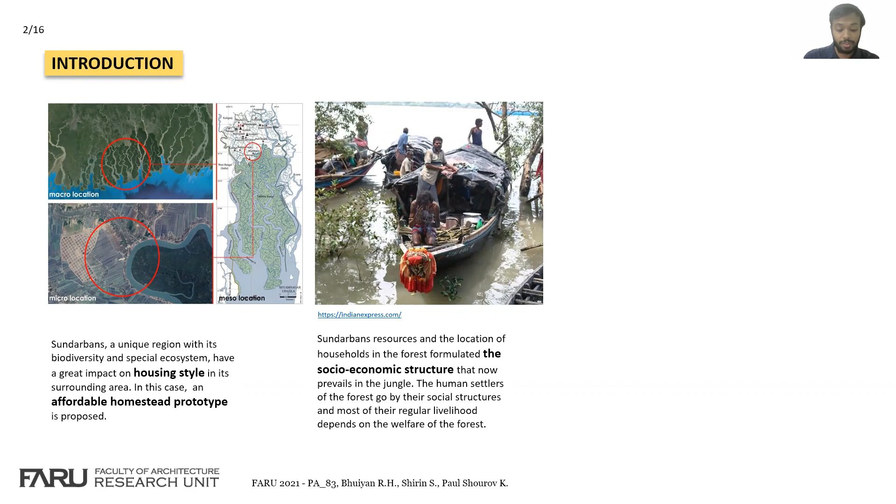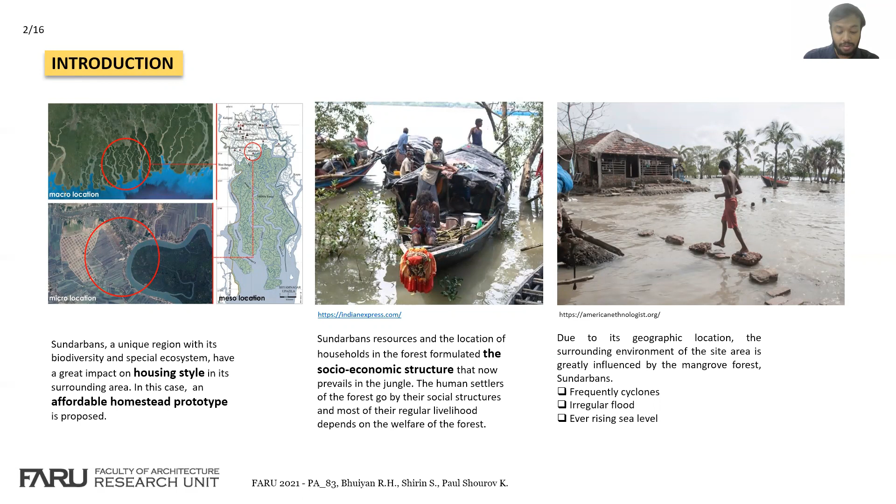Due to its geographic location, the largest piece of uninterrupted mangrove habitation of the world is a highlight for many natural disasters. The common natural hazards that the Sundarban region faces regularly are frequently occurring cyclones, irregular flood, and the ever-rising sea level that is causing the decreasing land area of the forest.

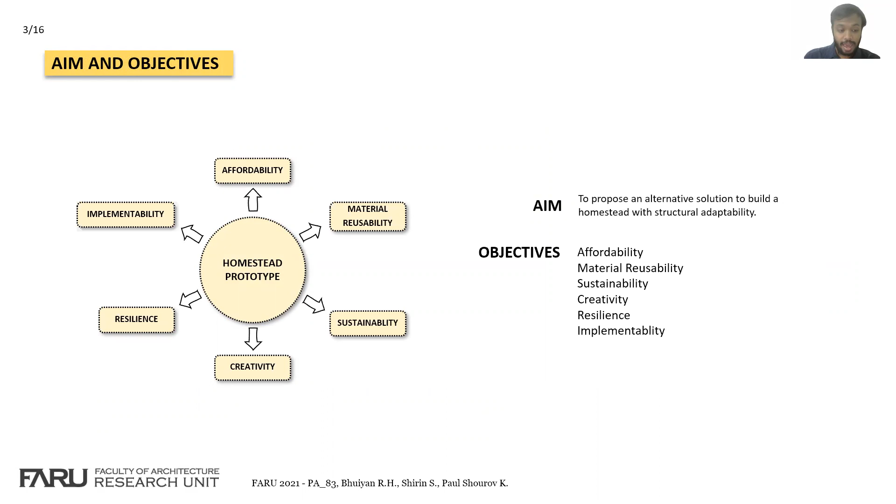The aim of the research is to propose an alternative solution to build a homestead prototype with structural adaptability. The objectives are to achieve affordability, material reusability, sustainability, creativity, resilience, and implementability.

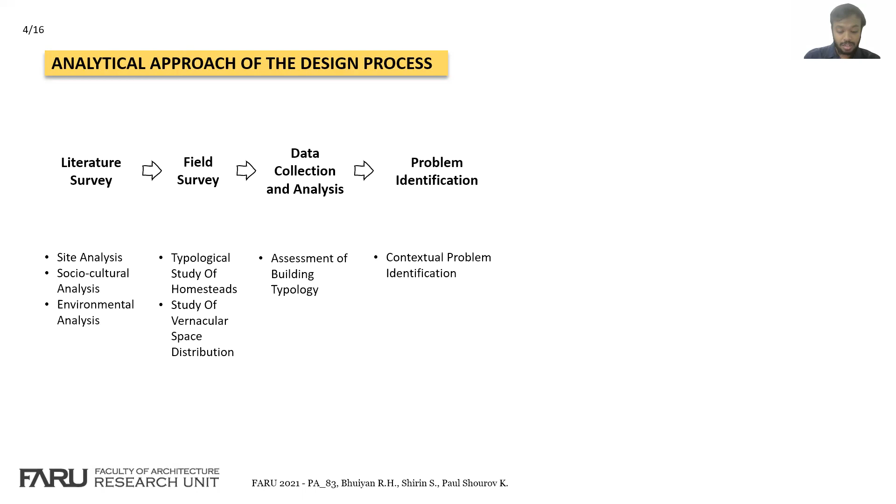The analytical approach of our research started with the literature survey and then progressed further through the field surveys. In this process, the social, economic, and environmental aspects were gathered, combined with the architectural practice that were present in their typical community structure. All the collected data and findings pointed to the special factors that a homestead in a unique context, such as the Sundarbans region, needed.

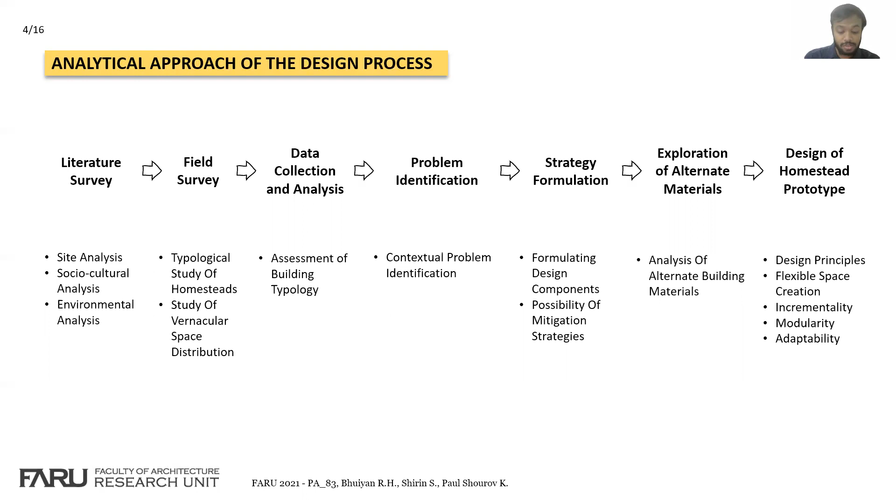Then the search for alternate materials that can withstand or can be arranged after a disaster was explored. All these materials were assembled into a courtyard-based design style respecting the already practicing homestead in the region. Overall, a climate-resilient and context-friendly approach was taken to provide for the disaster-affected people through a cost-effective design.

The building material study went through some typologies which were done in our field survey. The building materials were studied using the housing modules as clusters and analyzing how different materials serve the need of the typology and what the benefits and the limitations of the materials are in the context.

Here, typology 1 is related to such buildings whose mud wall acts as a load-bearing wall, generally with a bamboo structure to support the thatched roof using golpata. It is mainly for the low-income people. This building shape is rectangular, generally 10 feet by 15 feet. Its plinth level is generally raised at 2 feet or more.

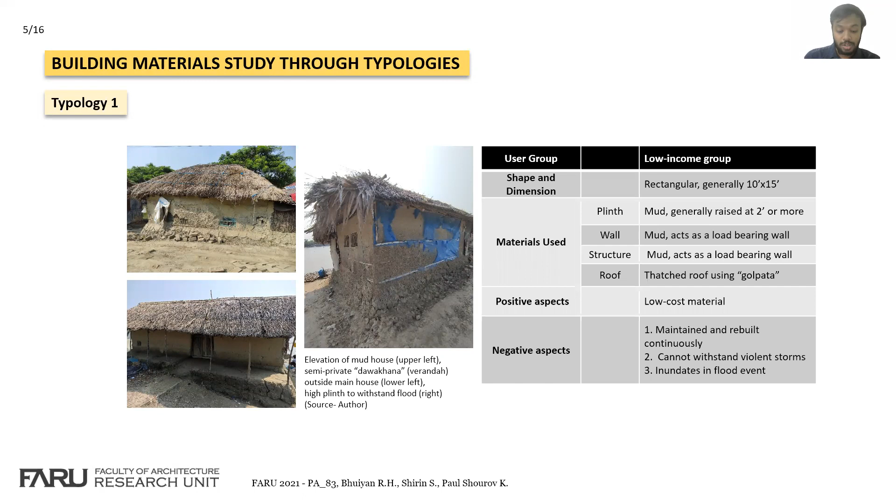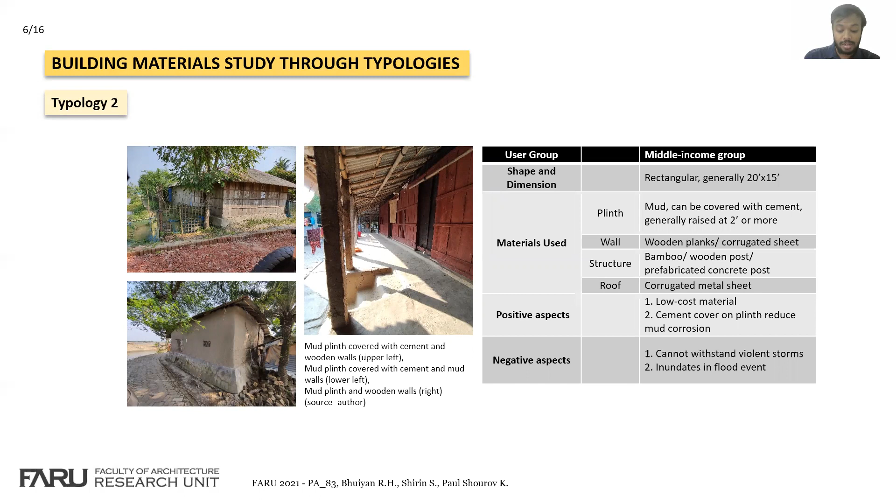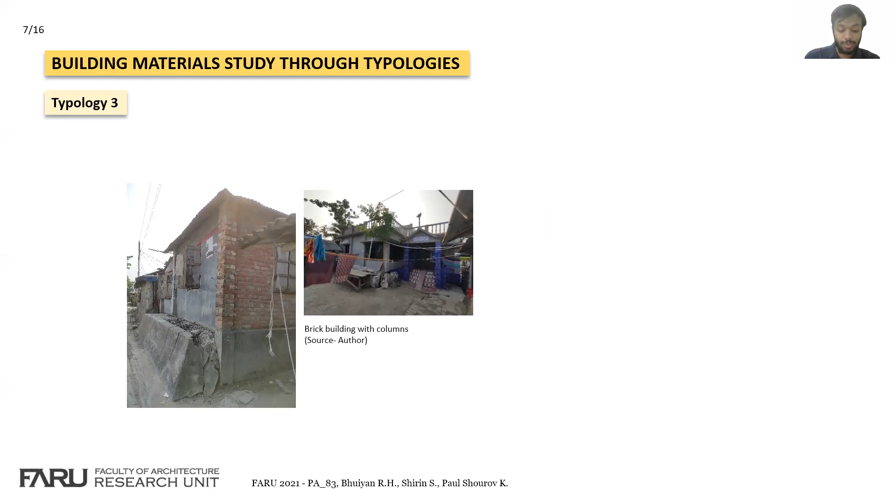For affluent families with a high income group, this typology is seen using a complete brick structure with a cement overlay and plastered brick wall. The roof is similarly corrugated and the plinth is generally raised at 2 feet or more, which can be covered with brick or cement. This building is of various sizes.

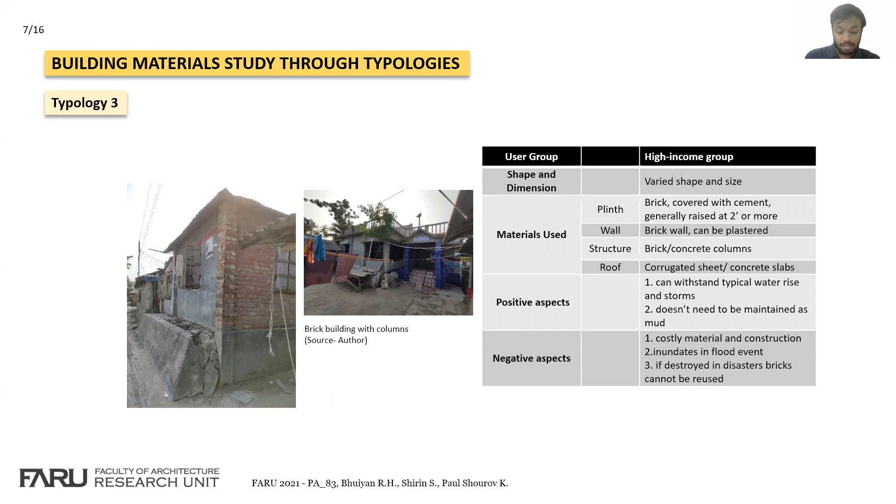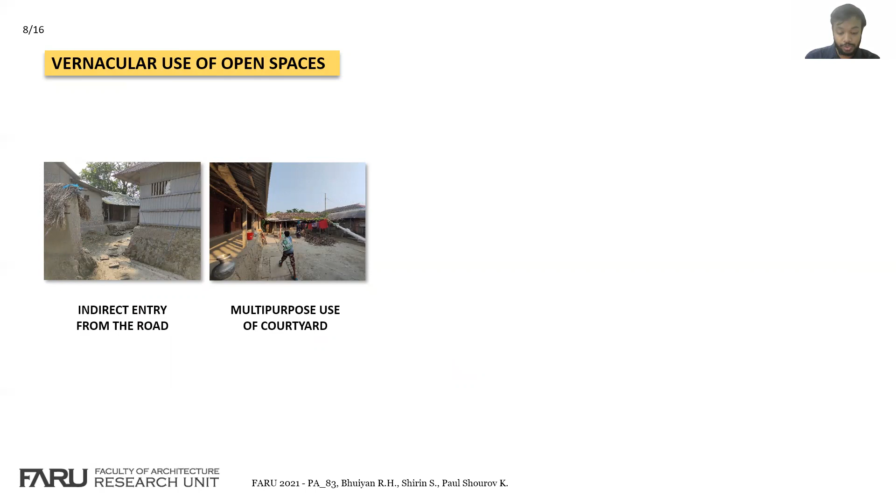Among different typologies, we saw some similarities in the spatial distribution. The houses can be accessed from the courtyard, but not from the adjacent road. The traditional approach is the formation of an inner semi-private courtyard, which is one of the most important factors in the rural homestead. Besides different domestic activities, it also serves as a playground for children and a space for communication between households. Ponds are generally on the backside and are used for water.

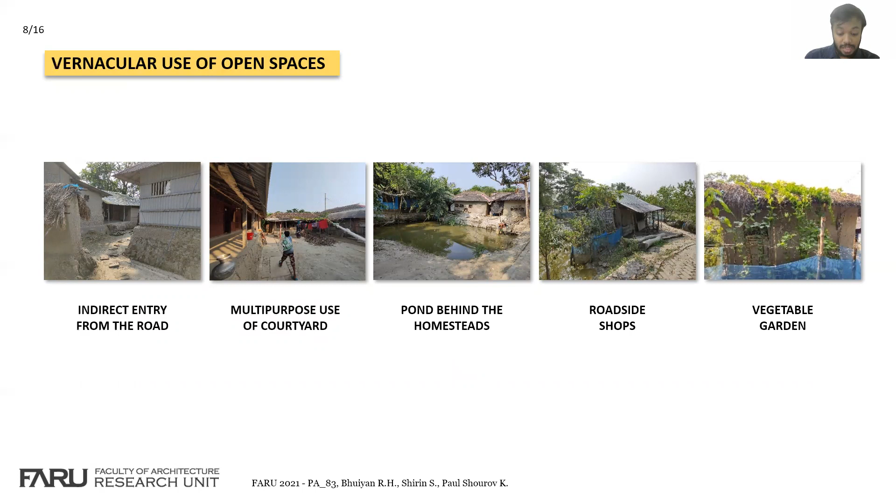Generally, the shops face the road, which is used for different economic activities and can be an extension of the house. The vegetable gardens are also a very important element of the homestead, which are used and maintained by the families for water and food.

From studies, we identified some contextual problems and some possibilities of the mitigation strategies. Problems such as the occasional rise of water level due to tide, even with raised plinth, the houses get submerged. In this case, a floating structure can help to adapt to both the water rise and the flood events.

Though the brick buildings in typology 3 can withstand the storms, due to affordability problem, they cannot be widely practiced. A possible mitigation strategy can be proper structural adaptability with low-cost materials. Considering the material durability, mud, golpata, wooden post, etc. deteriorate due to water submergence and rain. A durable material or proper treatment of natural material can increase the durability, and it can therefore be used.

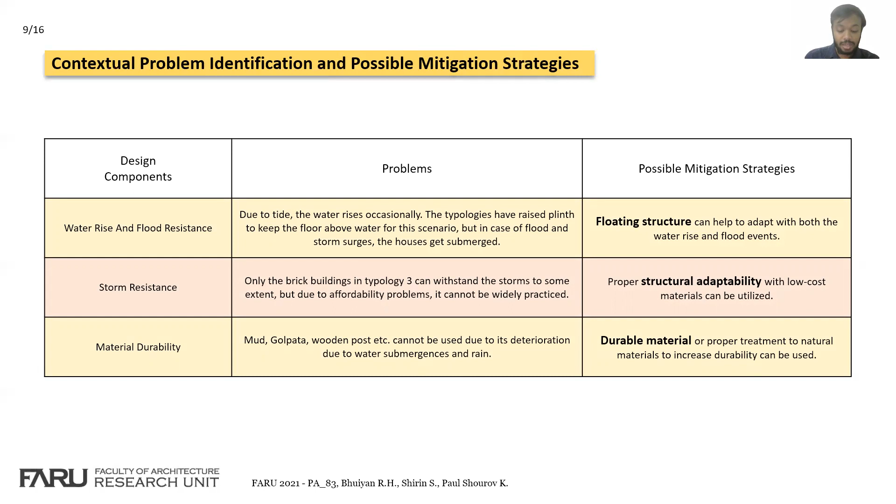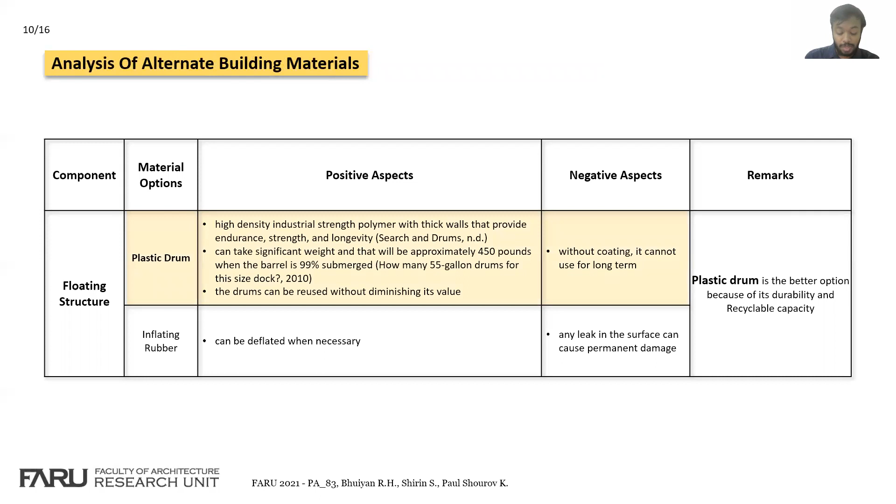From these problems and mitigation strategies, we identified some design components that we used for further exploration of the alternate building material. For the floating structure component, we explored plastic drums and inflating rubber. Both of these have positive aspects and negative aspects, but the plastic drums are the better option because of its durability and recyclable capacity. For the structural adaptability component, we explored bamboo, timber, and prefabricated concrete columns.

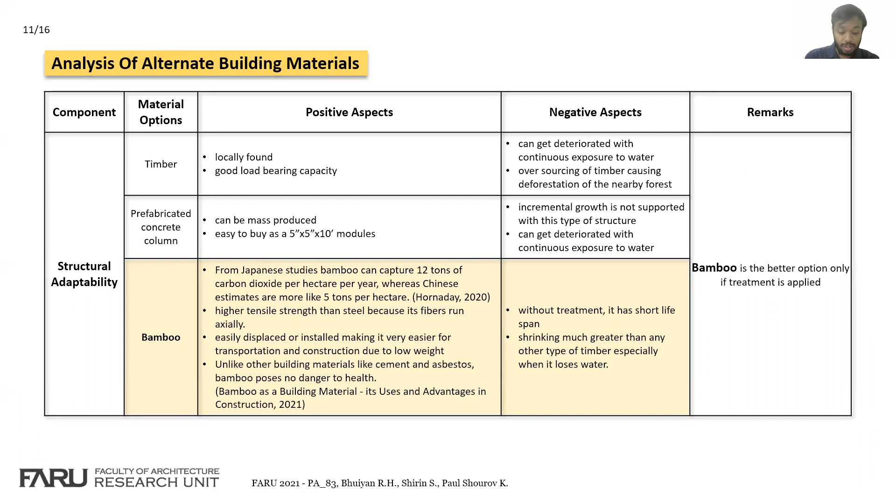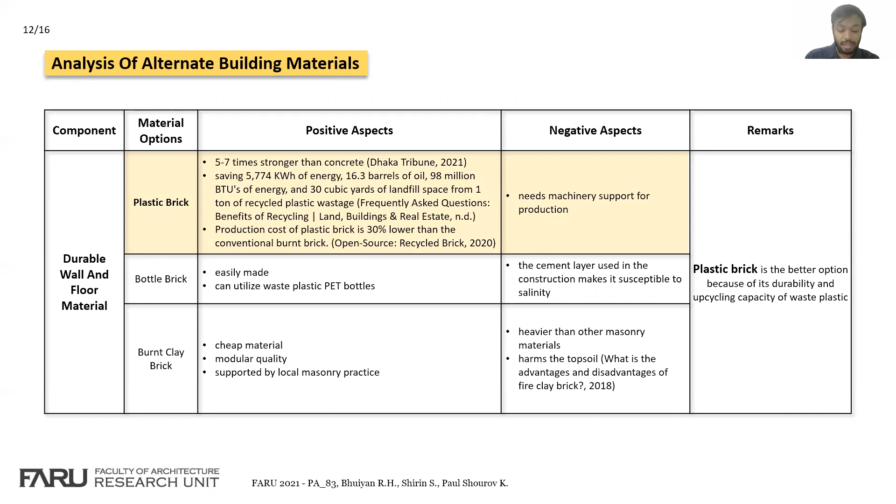Considering the pros and cons of the three materials, bamboo under treatment is considered a better option because it is durable, affordable material, and it gives the proper structural rigidity. For the durable wall and floor material component, we explored plastic brick, bottle brick, and burnt clay brick. But plastic brick is chosen as a better option because of its durability and upcycling capacity of waste plastic.

We try to explore how we can build a prototype using alternate building materials. Our design addressed the proper combination between floatability and structural rigidity. With the ground floor floatable only and the structural component properly fixed to the ground by concrete footing, the semi-amphibious structure can effectively withstand both strong cyclonic wind and flood at the same time.

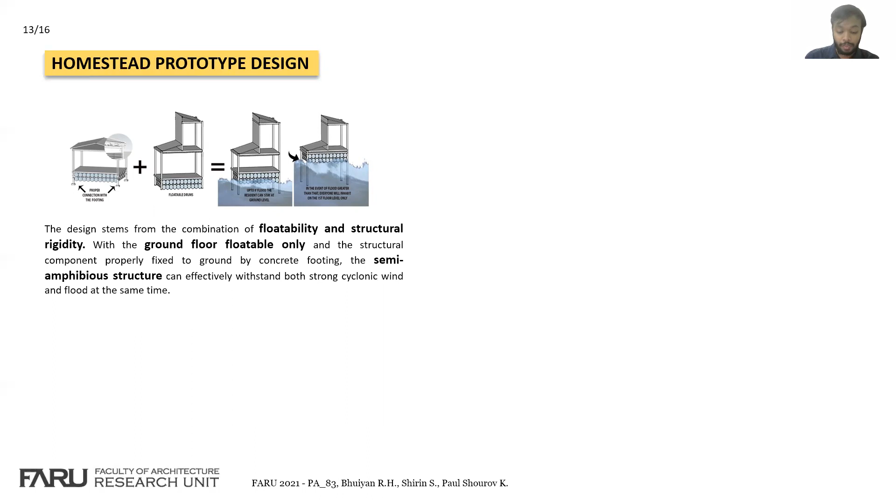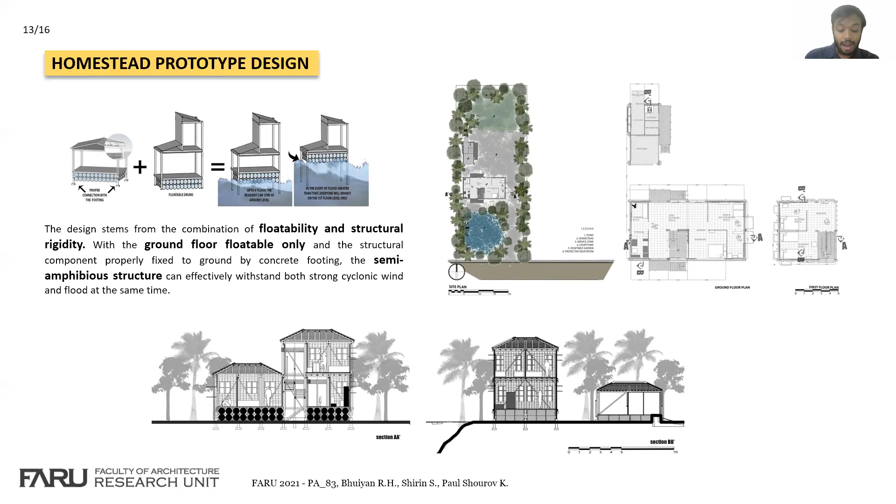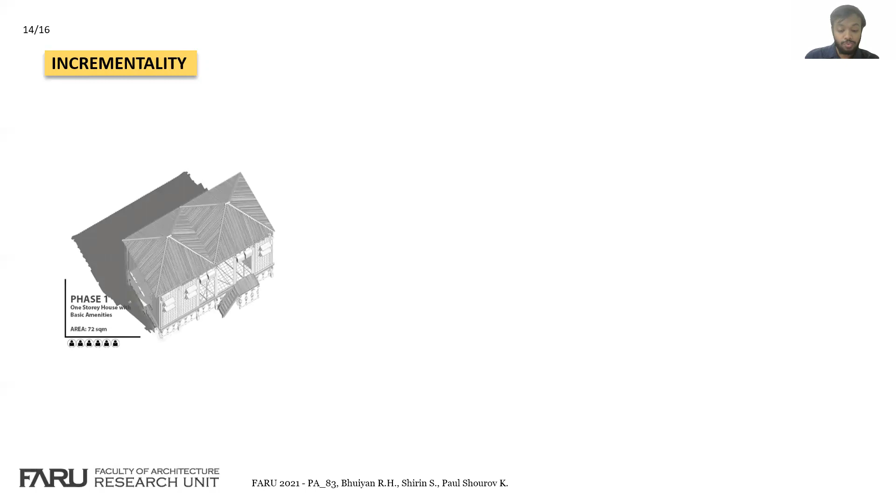Within an area of 1,000 square meters, the covered and semi-covered activity spaces together are 140 square meters. The remaining spaces are divided into courtyard and other open-to-sky activity spaces. One of the features addressed here is incrementality. The living area module can be incrementally grown in two phases, from phase 1, which is 72 square meters, to two-storied phase 2, which is 108 square meters.

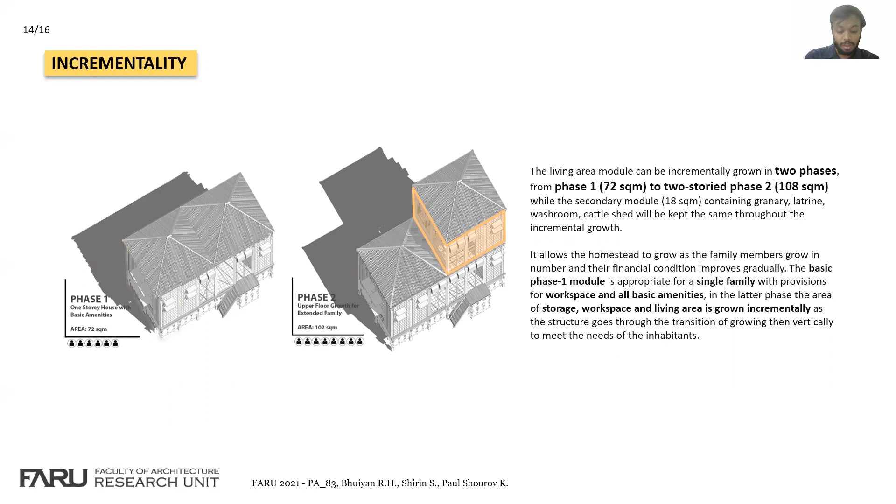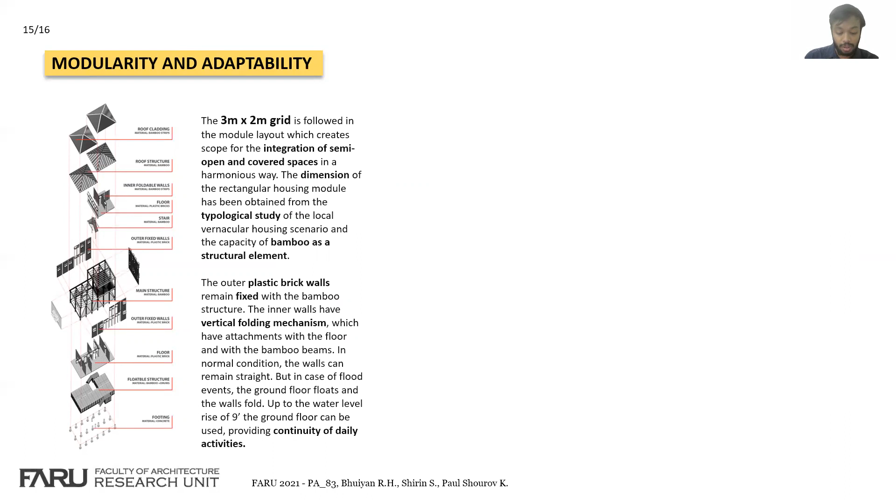The dimension of the rectangular housing module has been obtained from the typological study of the local vernacular housing scenario and the capacity of bamboo as a structural element. The outer plastic brick walls remain fixed with the bamboo structure, and the inner walls have a vertical folding mechanism which has attachment with the floor and with the bamboo beams.

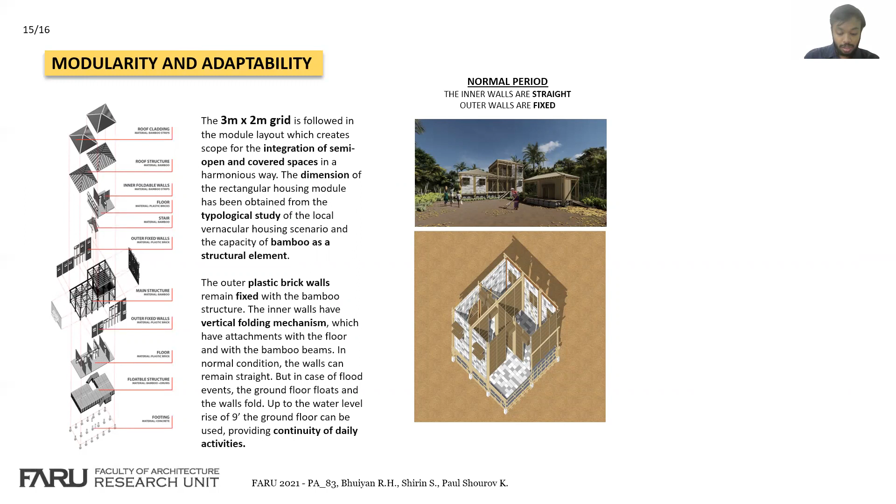In normal period, the walls can remain straight, but in case of flood events, the ground floor floats and the walls fold. Up to the 9 feet water level rise, the ground floor can be used, providing continuity of daily activities. We can see that the inner walls only fold, but the outer walls remain fixed.